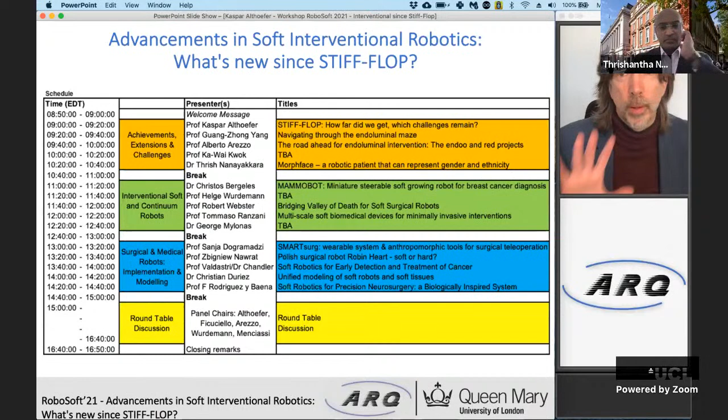...the origin of that workshop, so the project StiffFlop, and explore what we achieved there, and also look at the challenges that are still to be overcome. So really, the project was about...

...looking between stiff and floppy, as I've said, so to create systems that could be stiff, but could also then change and become floppy. Really towards the creation of a fully integrated soft robot manipulation device for minimally invasive surgery. And from that, we created our proposal, called StiffFlop, or in long: Stiffness Controllable, Flexible and Learnable Manipulator for Surgical Operations.

So an EU project coordinated by myself then at King's College, starting in 2012 and going to the end of 2015. And what were the objectives here?

The idea was to take inspiration from biology and to create systems - we were particularly looking at the octopus - systems that could morph from completely soft to entirely articulated, and then to really create systems that could be used for minimally invasive surgery.

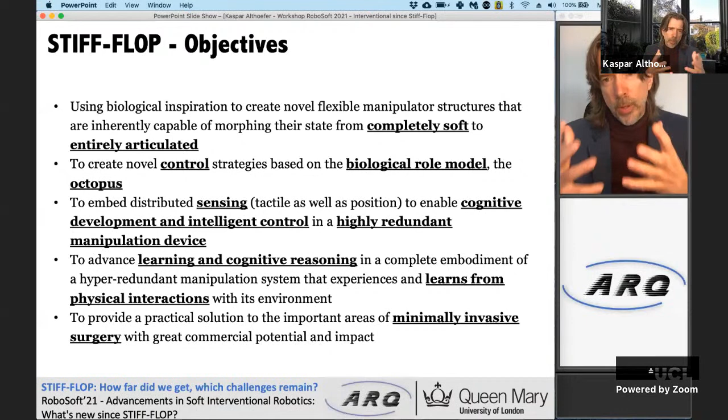And also looking not only at the device itself, but how it would interact with the environment and what we can learn from that. And at the end, we saw then this system that could be used in minimally invasive surgery.

As I kind of indicated, that was a large-scale project, and I can only thank all those who have contributed there.

In total, we were 12 partners, and today I cannot unfortunately discuss STIFF-FLOP in its entirety, so I will concentrate really on the soft robotics element.

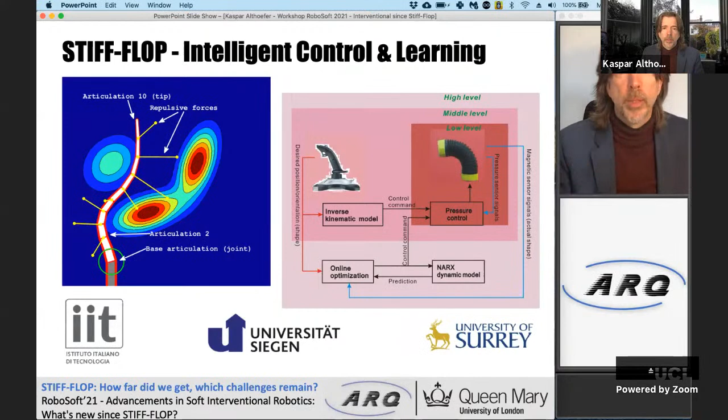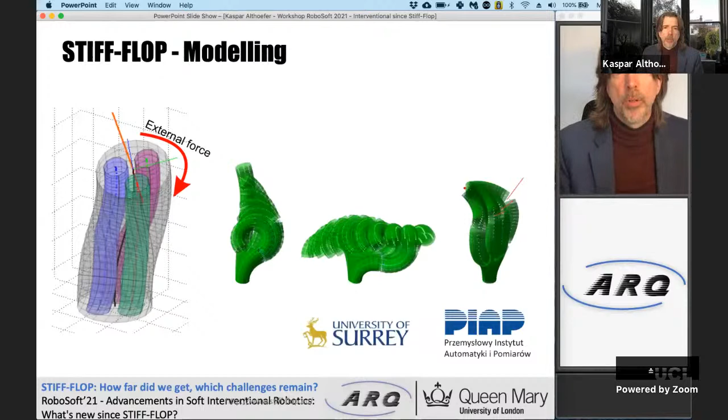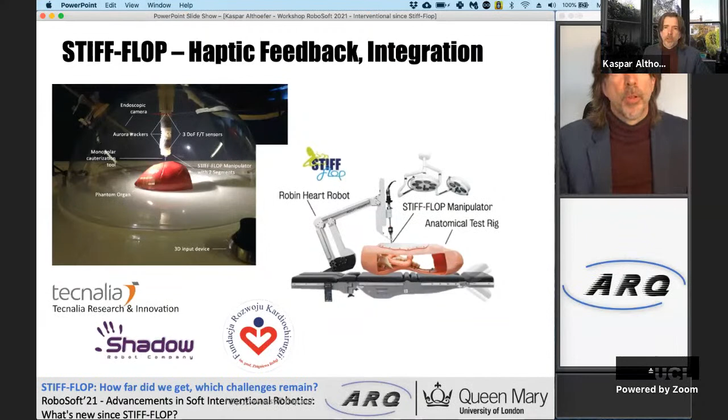There was work done by IIT on navigation for soft robots in soft environments. We had control from the University of Surrey. University of Siegen was contributing to environment acquisition, signal and image acquisition, and providing improved control strategies. We were also looking into modeling, with lots of input from PIAP and the University of Surrey. Very important too was haptic feedback for the user console, because we wanted to create a system integrated with the surgeon, who should still have control while automated functions improve their capabilities during interventions. There was lots of input from FRK, and it's great that Zbigniew is here today - he will speak more about the Robin Heart robot and other systems they've developed since. There was also support from Tecnalia, and Shadow was instrumental for the integration of the whole system.

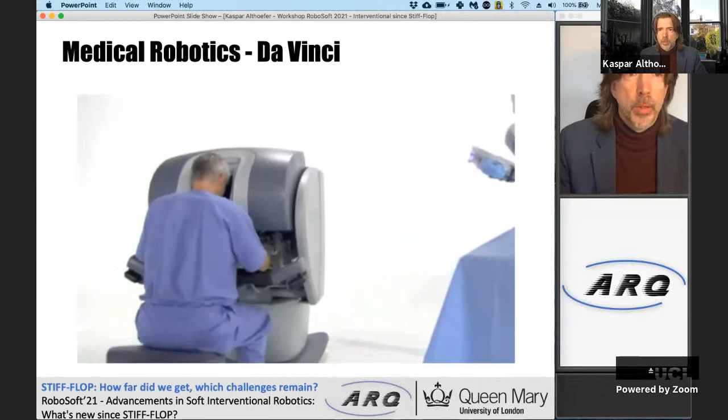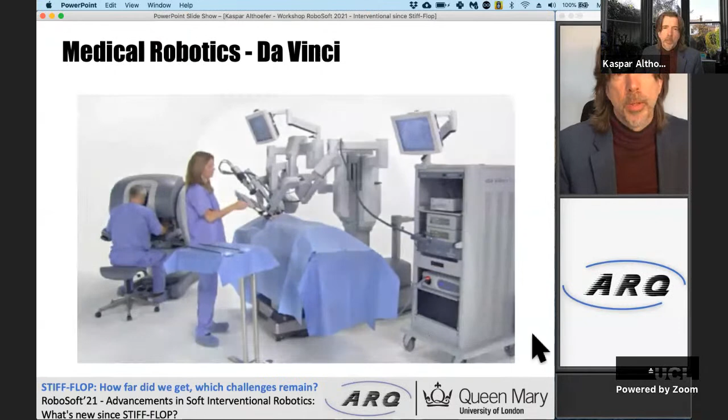The idea really was to move away from systems like the Da Vinci robot - here's just a quick video, you might have seen it beforehand - a system made of rigid components. That's an older system, but newer systems are based on the same principles. Also worth mentioning is very interesting work by colleague Guangzhong Yang, who will be speaking later. At the time, he was working at Imperial College, developing the iSnake and pushing the frontiers there.

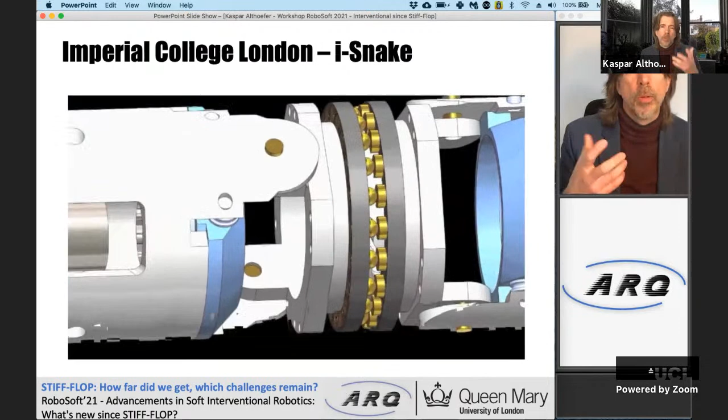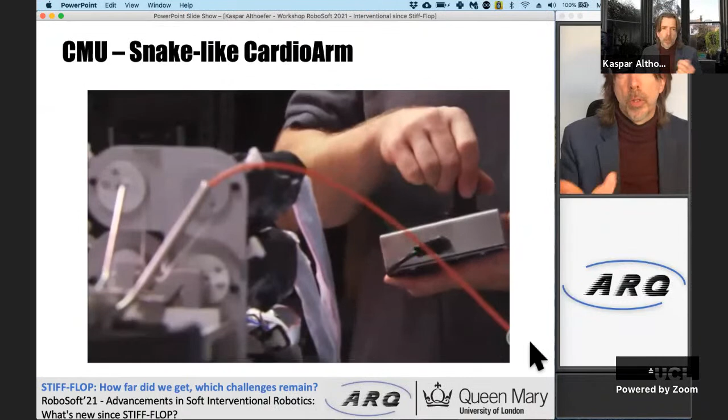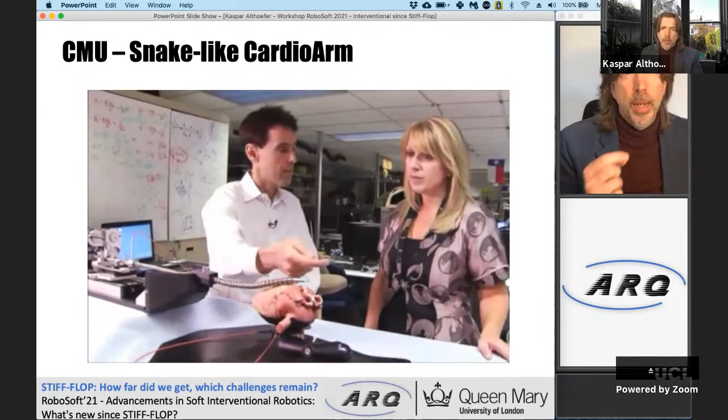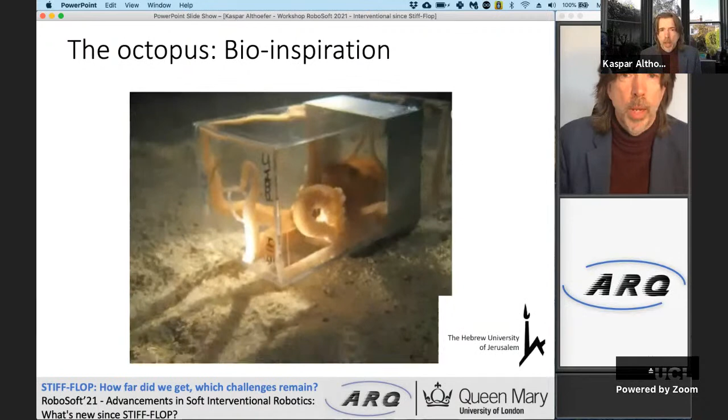But our approach was to go beyond that. Here's another example of what was happening at the time, developing the snake-like arm - again, a very fascinating system. However, we wanted to take one step further, moving away from all rigid components in the systems we were planning to develop as part of our STIFF-FLOP project. Our eyes were really very clearly on the octopus, taking inspiration from that fascinating element.

We had also a biologist on board, Benny Hochner from Jerusalem, advising us on the biological front. The idea was to look at that problem from three directions: we had scientific experts from biology, loads of experts from the engineering side, but of course it was also very important to bring in experts from medicine to ensure that what we develop is suitable for the problem we were investigating - that is, minimally invasive surgery.

Alberto is here today, and he will speak about the newest developments in that area later. We also had input from Prokar Dasgupta from King's, advising us on what is suitable for minimally invasive surgery.

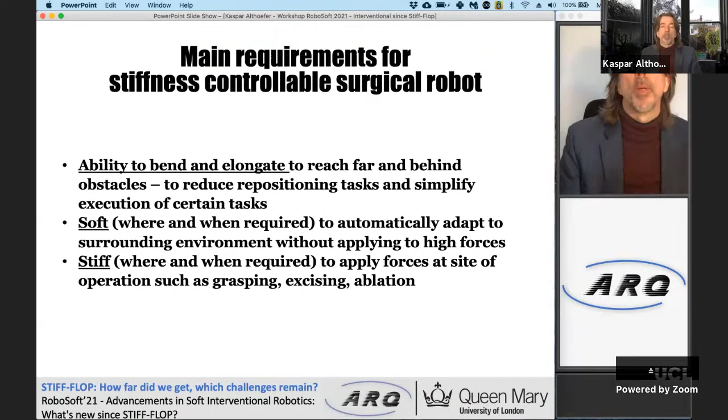Our project was really about creating a system that could go beyond the standard laparoscopic tool - very rigid, made of metal materials. We wanted to create something with the ability to bend, elongate, and move inside the human body beyond obstacles, carrying out different types of tasks as required by minimally invasive surgery. Very key for us was not just to create something soft, but also capable of changing its state from soft to stiff. Soft, because we wanted it safe and compliant to the environment, but stiff is sometimes needed because forces need to be applied during operations - for example, grasping, excising, or ablation.

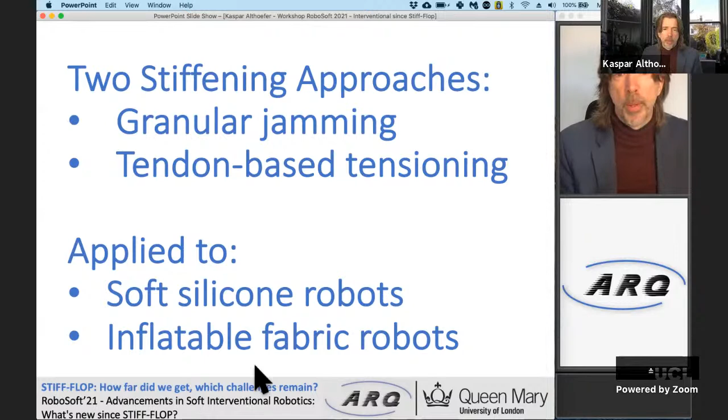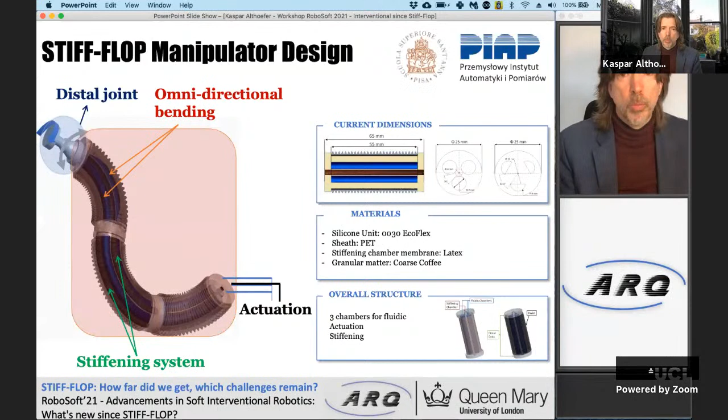So we were focusing on two main approaches. The project went beyond that, but I only have a short time to highlight the main points with respect to the soft robotics side. We were looking into creating soft robotic devices, but also different ways of stiffening - changing from soft to stiff. One was granular jamming, another was tendon-based tensioning. We applied these to two types of robots: soft silicone robots, and inflatable fabric-based robots. For the soft silicone robots, from the beginning we had in mind a modular approach, systems made from silicone rubber and pneumatically actuated.

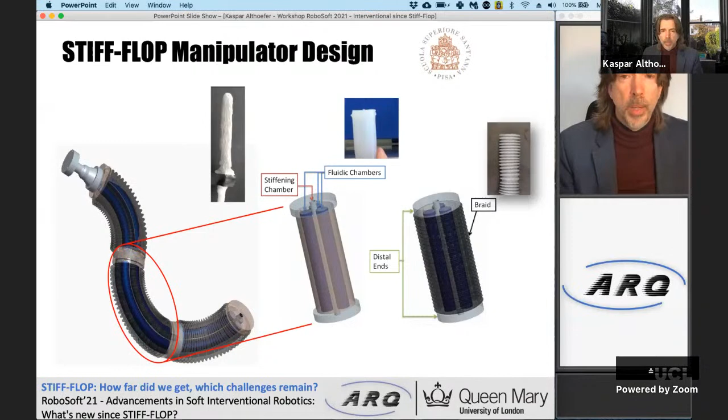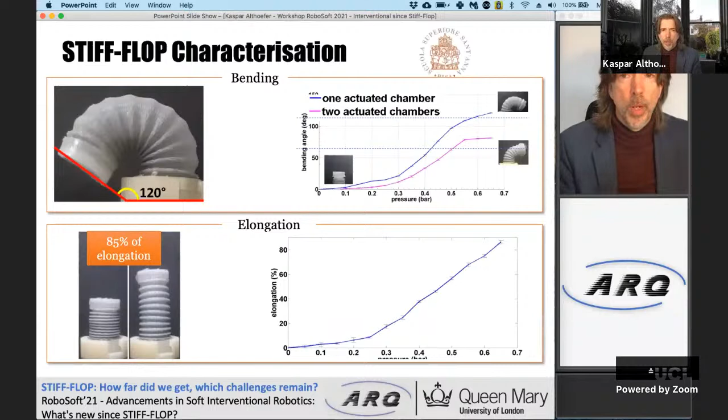So I will skip now quickly through a number of systems that were being developed, and lots of input came here from SSSA in Pisa. As you can see, we went through different stages that were the earlier systems, but already those proved to be very successful in being capable of bending, elongating, applying forces, and being also able to survive quite some strong force from the outside without breaking.

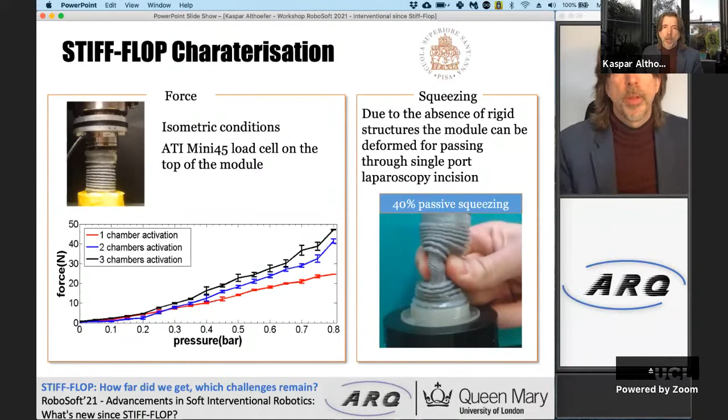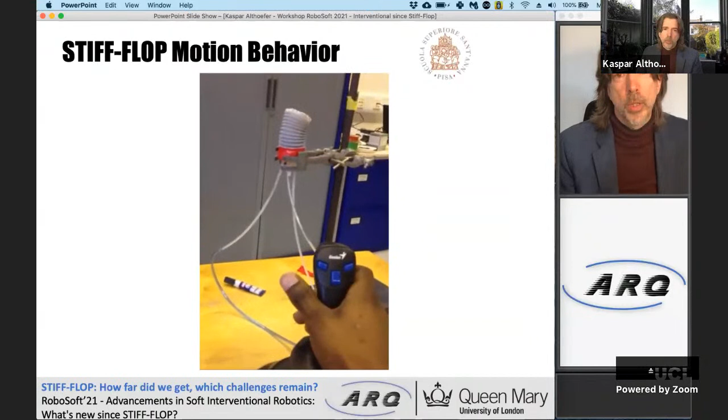So here we can now see one of those little robot fingers in action. That was one of the segments, pneumatically actuated, with 3 chambers in that segment, and you can see the joystick moving there in the foreground.

That is controlling the air pressure going to this small robot arm. We were quite happy with that, but there were issues with the control. The system was very nonlinear, and we had to also add a membrane on the outside to contain everything. So the idea forward was to create a system that had the reinforcement on the inside. So we created these silicone robot arms or segments.

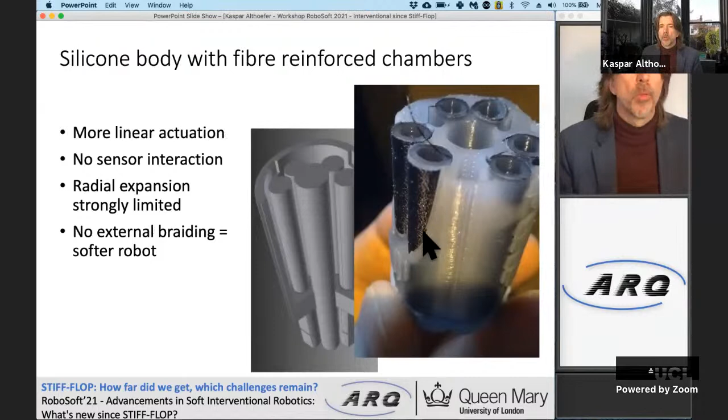Here in gray, the silicone rubber, and in black, those chambers that can be inflated. The black is actually a helical fiber on the outside to keep things together and to allow longitudinal extension within those chambers, which then leads to bending in different directions.

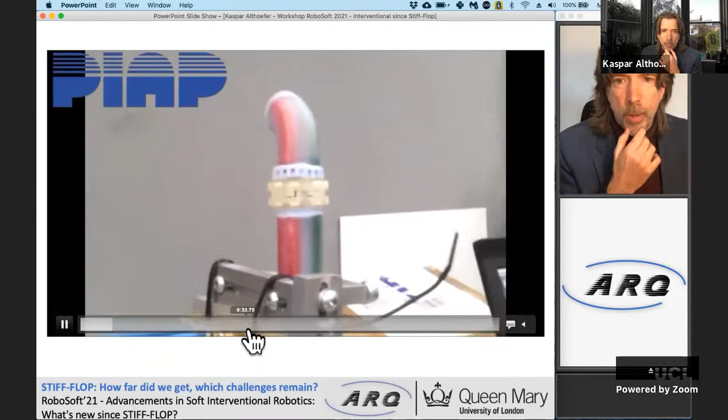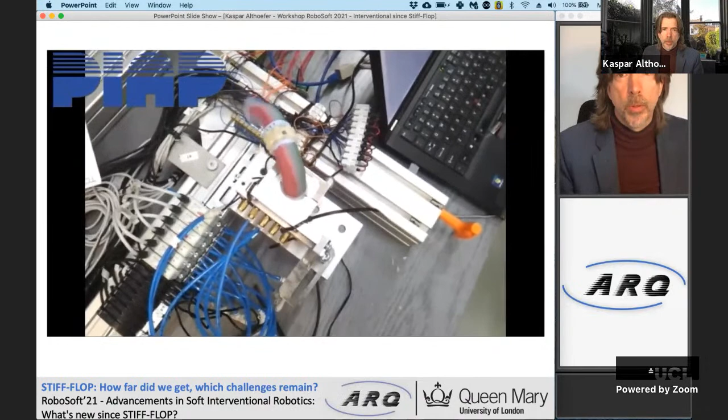Most of you have seen that video probably already. Here's an earlier prototype where we were testing the capabilities, and that is pneumatically actuated now, very soft, but still quite controllable, at least with a joystick. As I always say, this is running in real time, so nothing is speeded up here. Good control, but also good speed can be achieved.

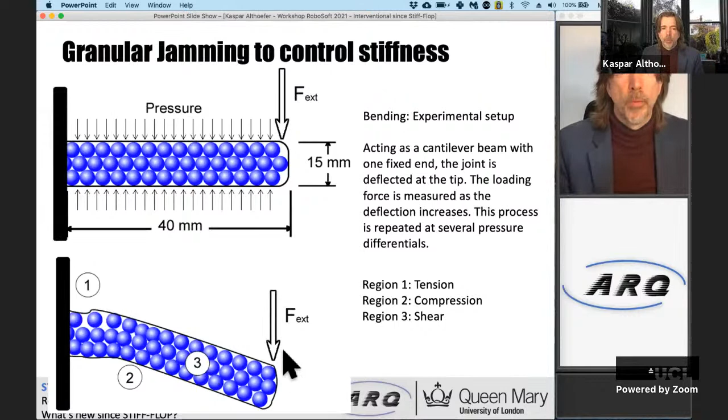However, if we then allow air to come in, the whole structure becomes soft, and when we apply forces, bending is much more obvious.

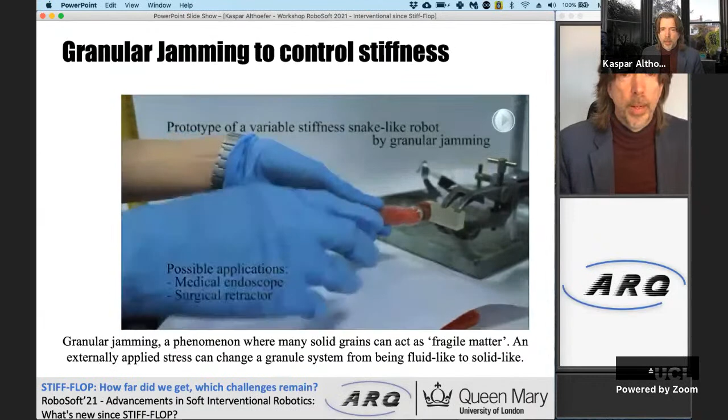And that was then tested in a number of systems. Here we have a snake-like system, and now we apply the vacuum, and once you have applied it, the stiffness is increased. The posture that we have achieved there is kind of frozen. The system is stiffer now than beforehand.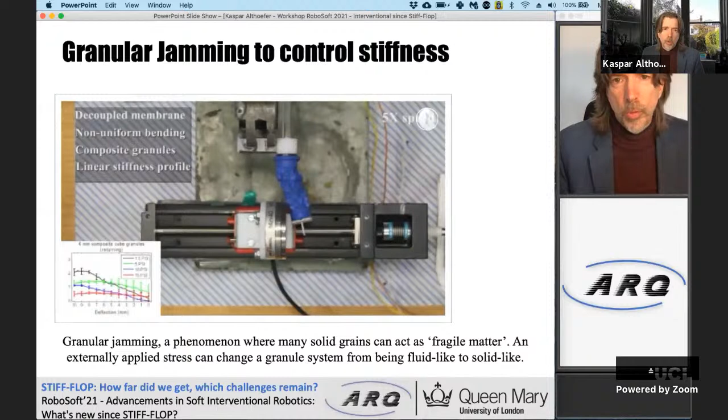And we were integrating that into our system, so we could now create robotic devices that could move around, but also be stiffer, or stiffness could be changed.

We also developed a tendon-based stiffening approach, and that came actually—I will come back to that at a later point. We applied this approach also to our soft robotic structures, the ones I have presented beforehand. The idea here is to integrate tendons into that structure, and these tendons can be pulled, so tension can be applied. So the idea was to create an antagonistic stiffening system.

On the one hand, the air pushes in the chambers, trying to extend the chambers, but on the other hand, there are tendons.

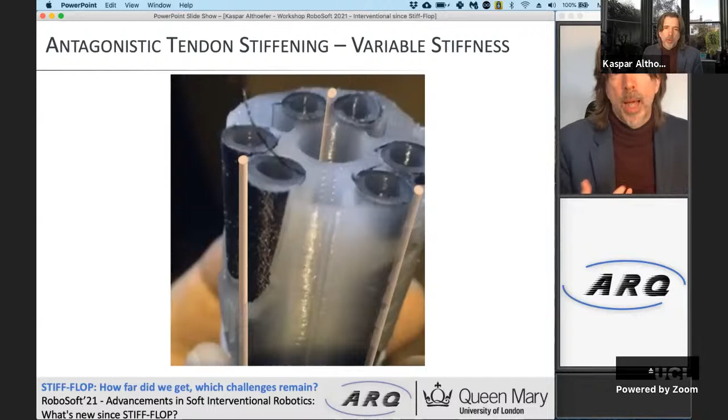So these tendons pulling down against the pressure pushing up—we have an antagonistic system that allowed us to control the stiffness of these devices. We integrated that, as I said, into our silicone robots, and we could show that stiffening could be increased by this approach.

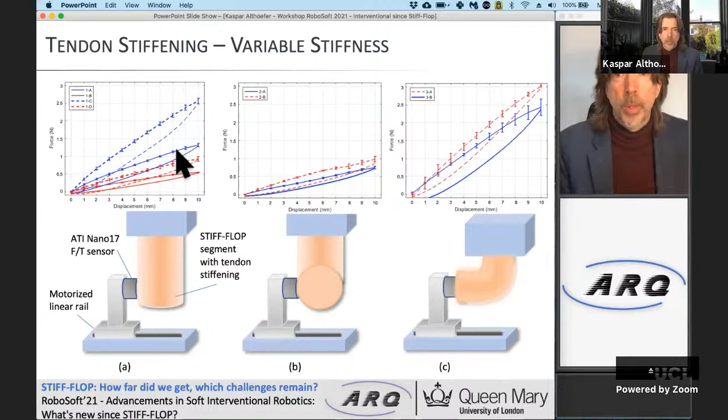For example, here on the left-hand side, very obvious, without the stiffening by the tendons, we have a low stiffness, but higher forces can be achieved if we now pull the tendons down. And we moved forward on the developments.

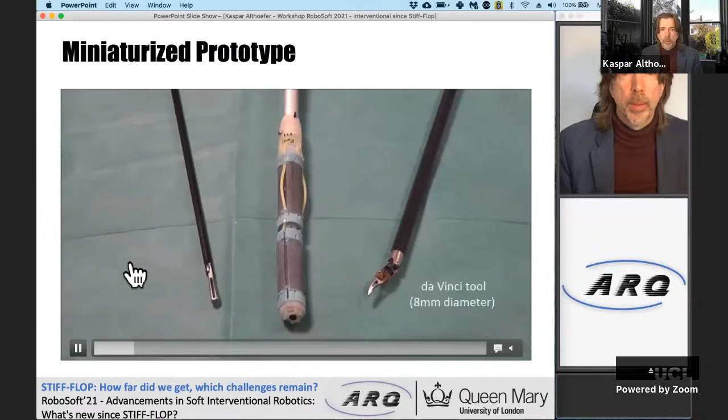We were able to miniaturize one of the big challenges, and we created the system that is here in the middle. And here we can see it moving about.

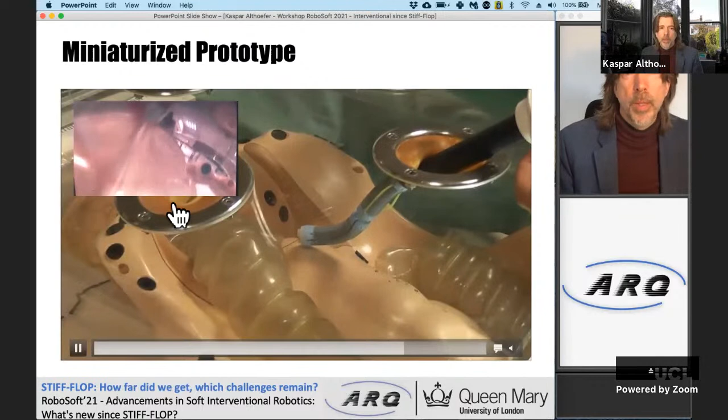So a 2-segment system with a camera integrated, and that was actually also then able to move through a standard trocar port into here a phantom of a human, and you see on the left-hand side in the inset the camera images coming back. We were actually able to move also into a human, so that was a cadaver study.

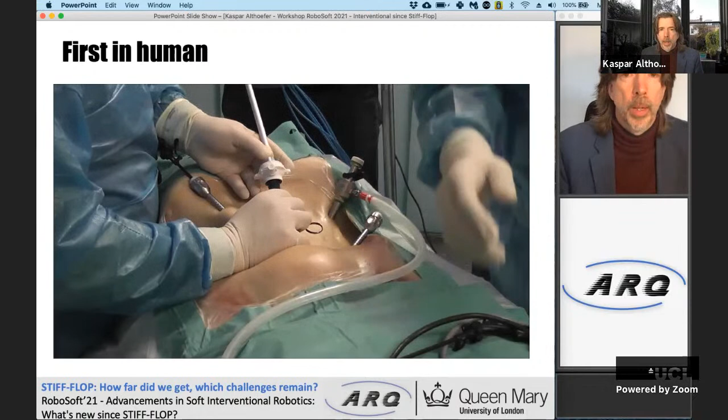Here on the left-hand side is actually Alberto, who will be speaking later, supervising the experiments that we were carrying out. The system showed to be successful in moving about in the internal cavities of this cadaver.

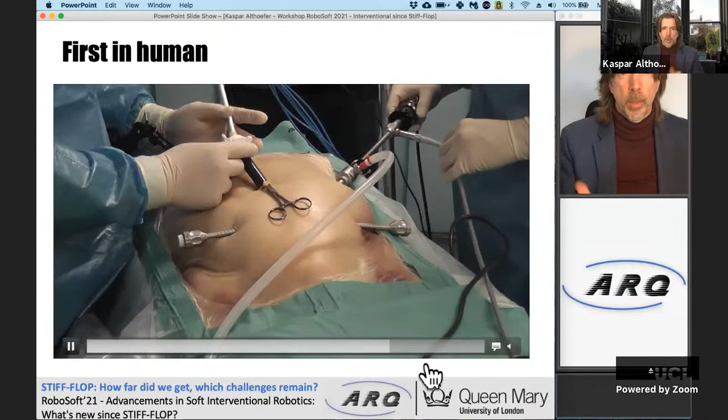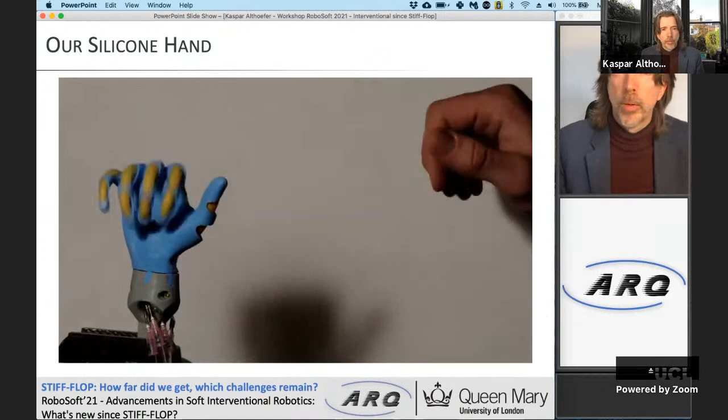Just a quick extension from that work. So based on this idea of soft silicone robotic structures, we created a prosthetic hand, you can see here.

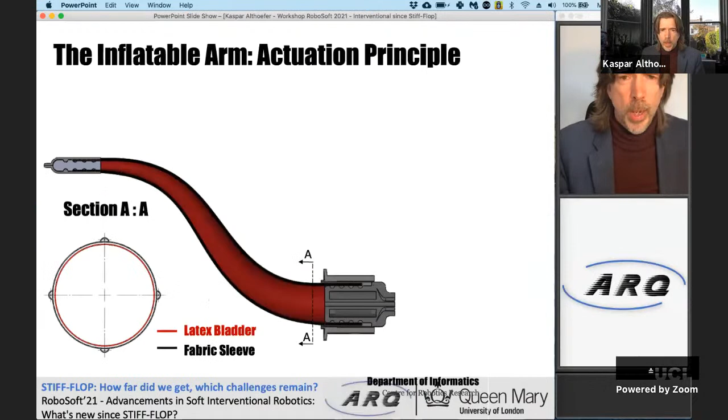Now I would like to also speak about our inflatable structures that we developed. Here again, we had this idea of applying an antagonistic approach. You can see here a structure made of a fabric in black around the red void in the center.

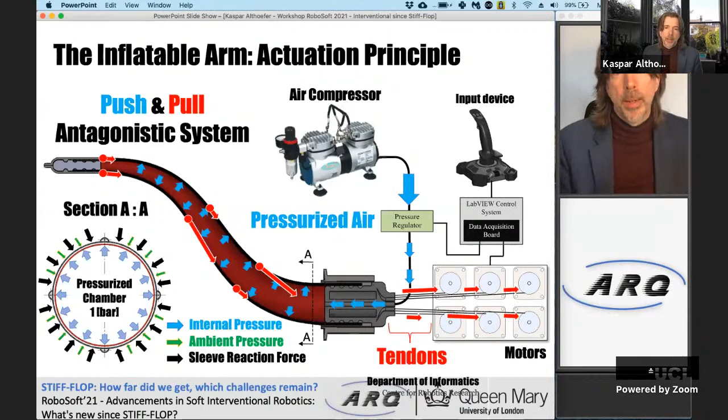Air is pumped into this airtight fabric-based structure, and that allows us to deploy the structure. Tendons attached on the outside can be used for navigation, but can also be used to operate against the air pressure moving into the structure, and in this way change the stiffness.

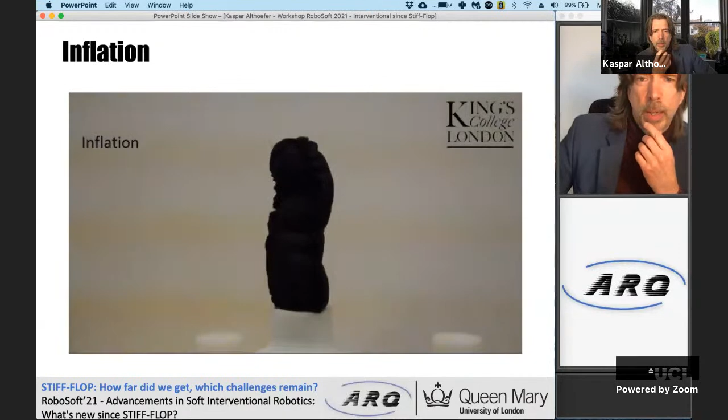I would like to highlight this particular one. These inflatable structures were actually also having another nice effect. You could compact them very much, and then from a very small volume, expand into a very large volume. So very useful for the deployment of structures.

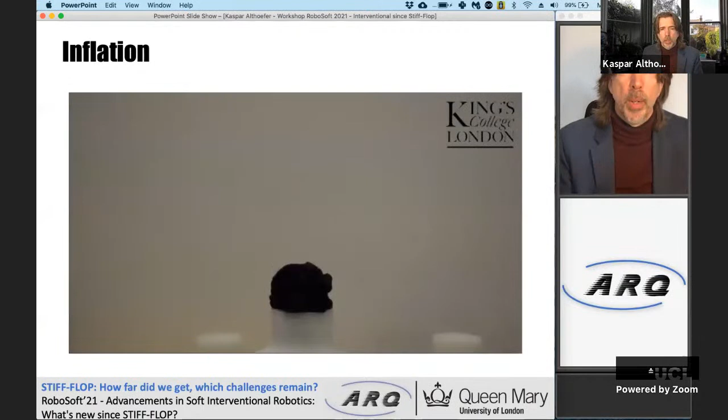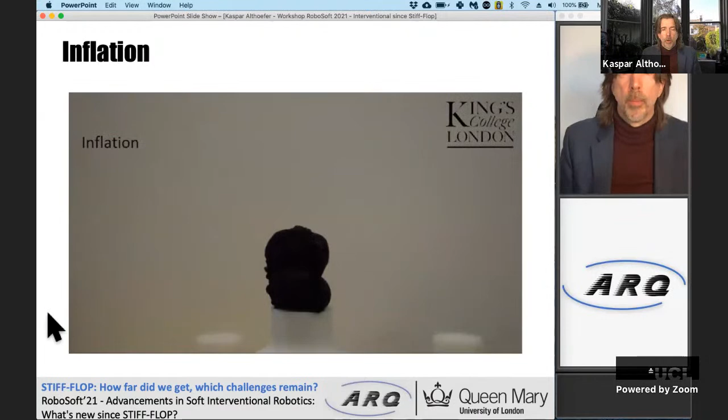And I would argue very much ahead of the competition. So these were already growing robots, and that was before eversion robots were being looked at, as you probably know from Alison Okamura and Elliot Hawkes.

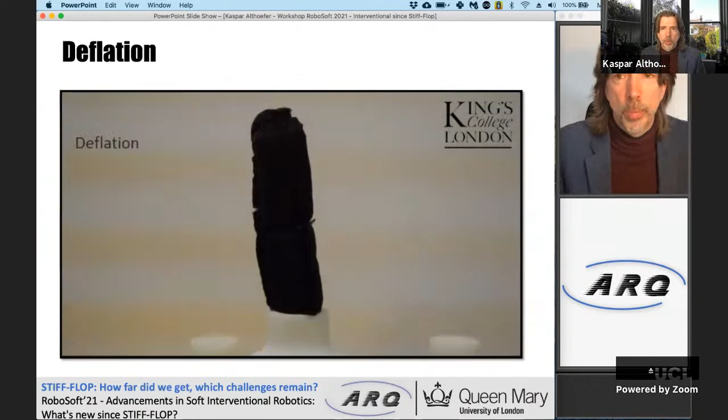Once you have carried out your job, you can deflate it and take the system out again. You can use the tendons to steer the system in different directions.

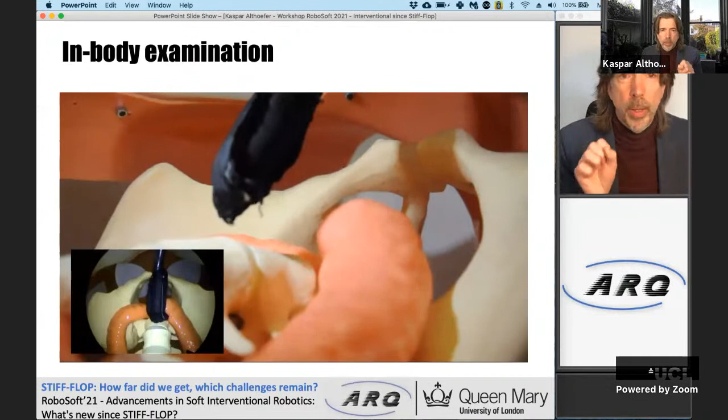We were of course keen to see whether that would also be suitable for use as a minimally invasive tool. Here you can see how our system pushes through the trocar port and then can be moved around. Interesting, it can go through a trocar port that is actually smaller than the maximum diameter of the inflated structure. And we moved that further.

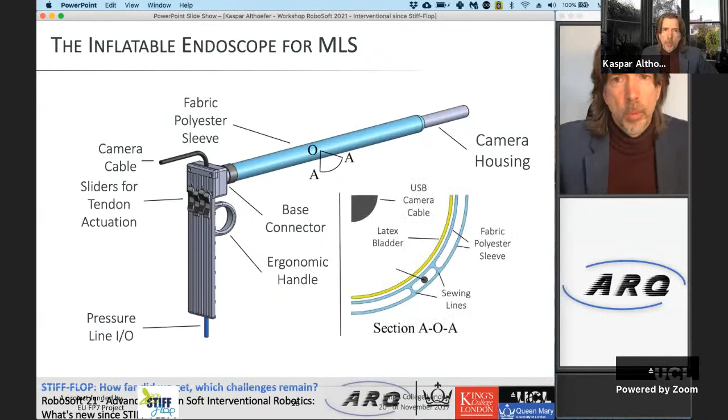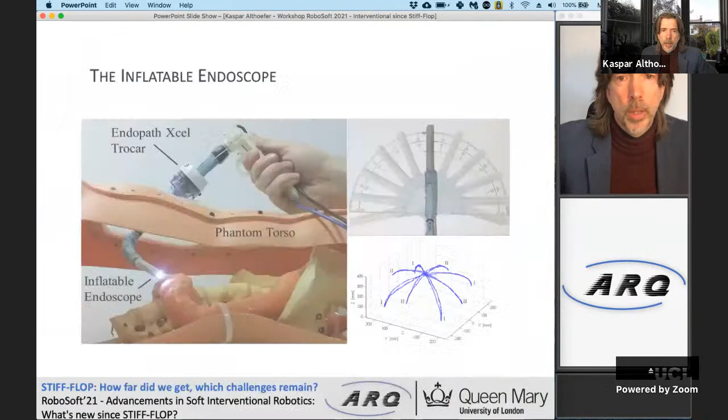I think I've seen Agostino earlier here. That was then turned into a system that could be used as an endoscope, so an inflatable endoscope. You see it here to contrast with existing systems that are rigid. That system could be then also inserted through a narrow opening, with a camera at the end used for inspection of the inside.

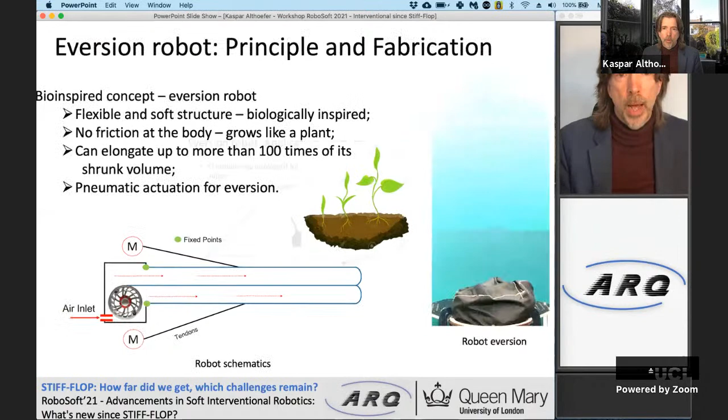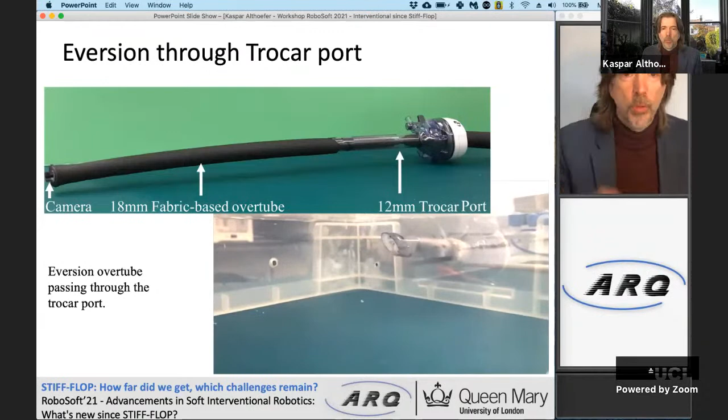So I have to hurry up now because I see I have only 3 minutes left. We are also now looking at everting robots, robots that unfold like a sleeve. We have done some early work here to explore whether these could be used as an overtube in minimally invasive surgery. You see here now an eversion robot pushing through one of these trocar ports.

We have extended that now, and you can see here that it's outside the medical field. We have now also created eversion robots that can evert and at the same time bend in different directions.

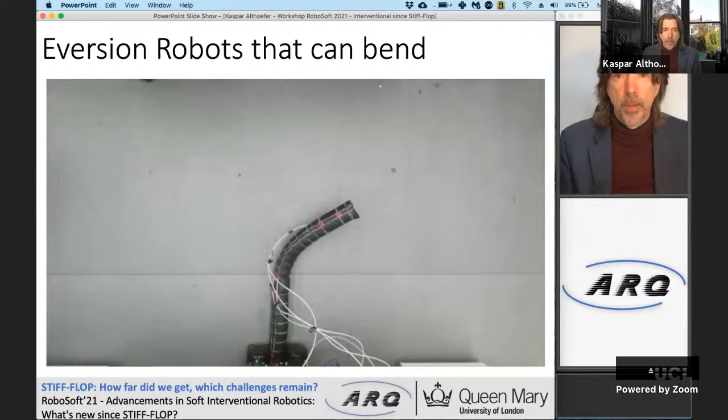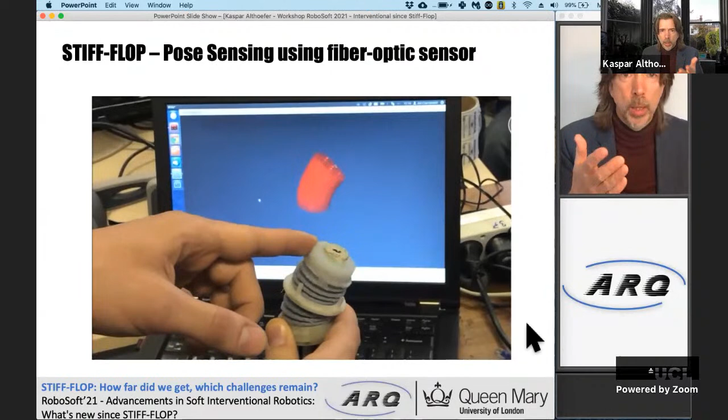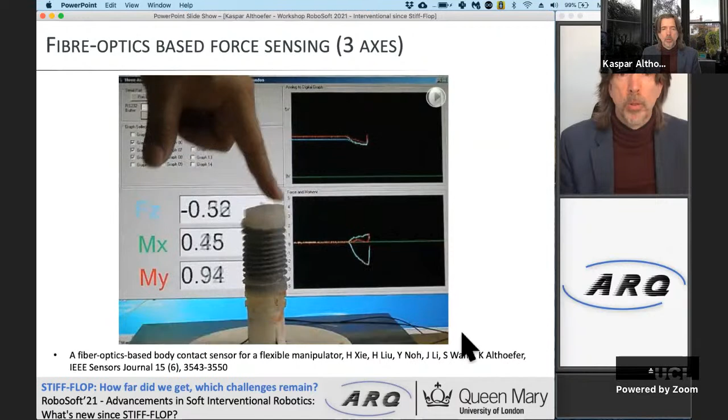Just a minute on perception in soft robotics, also a very important topic of STIFF-FLOP. We were looking at optic-based approaches, using fiber optics to measure bending or shape. We were using electroconductive yarn as well, as we can see here, and we also used the optics approach again to measure forces on structures.

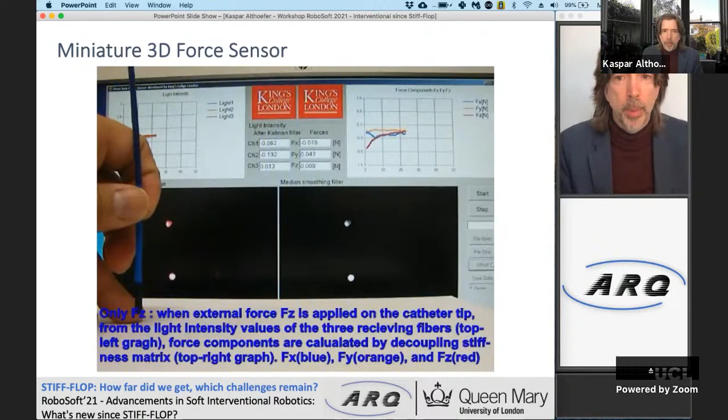We were able to miniaturize that down to a very small diameter, 3 millimeters here, a 3-axis force sensor at 3 millimeter diameter. But one of the big problems was that these fibers were flexible, but not soft.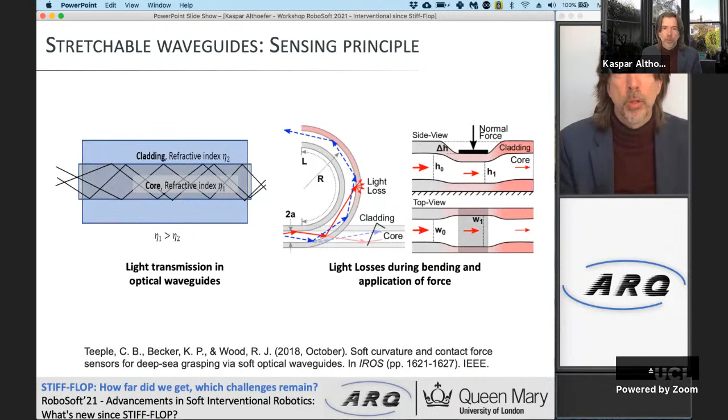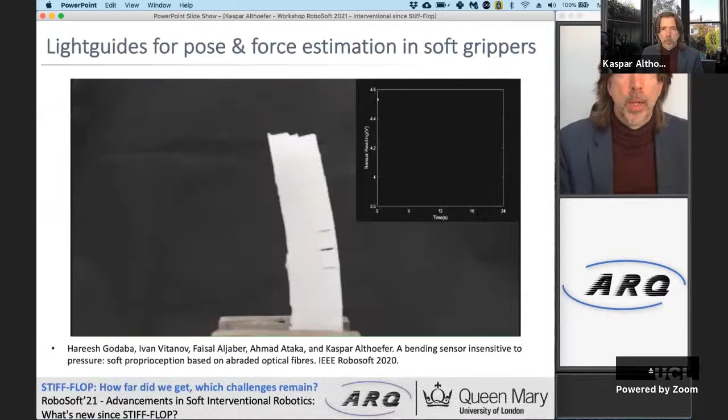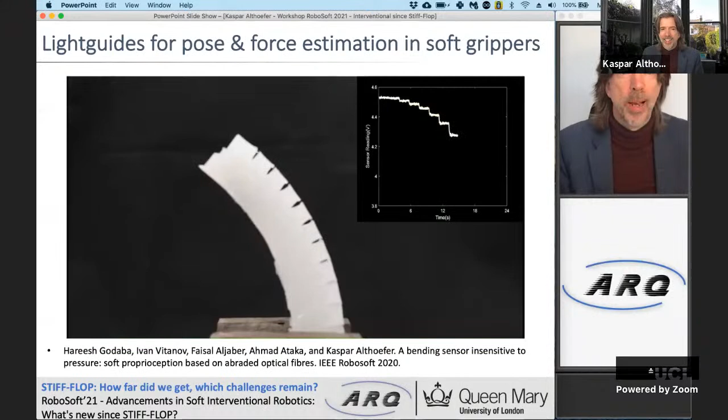So recent work focused on creating light guides made from silicone rubber for integration with robotic structures. I want to show here this example of a soft robot finger, which is now bending. As you can see, for every movement the robot does, we can measure the light intensity of that light guide and use this to get an appreciation of the bending of that particular finger.